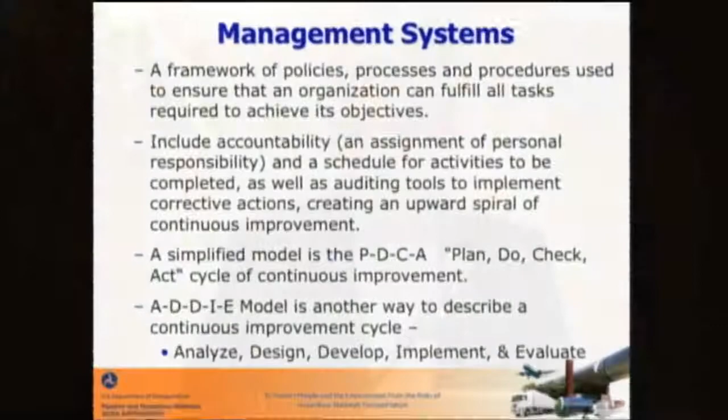That's what PHMSA sought to do with risk management programs since very early. In fact, we started with the risk management demonstration project and the systems integrity project, and then in the 2000s we implemented the hazardous liquid and then the gas transmission integrity management rules. Recently, in 2010 and 11, we implemented the distribution IM program and some hazardous liquid gathering integrity management requirements also. So we've now got the whole cadre of integrity management programs up and running.

Now, we've continuously sought to evaluate our performance on these. PHMSA is a team-based organization, and our teams of inspectors are grouped together based on whether it's gas transmission IM or hazardous liquid IM, and we bring back all the lessons learned, typically on an annual basis or through quarterly calls, and bring that into a team to understand what we're seeing on the inspection front and what our concerns are.

You may see a lot of those reactions in the frequently asked questions on our website. So you can look at the ways we're trying to continuously adjust and communicate our expectations about the integrity management rule.

We also use the data, and we've seen a lot of data, and of course I've got some data in my presentation, and data can go any number of ways depending on what we're looking at. Certainly we utilize our incident and accident data as feedback, and also our enforcement history on what we're seeing from our enforcement.

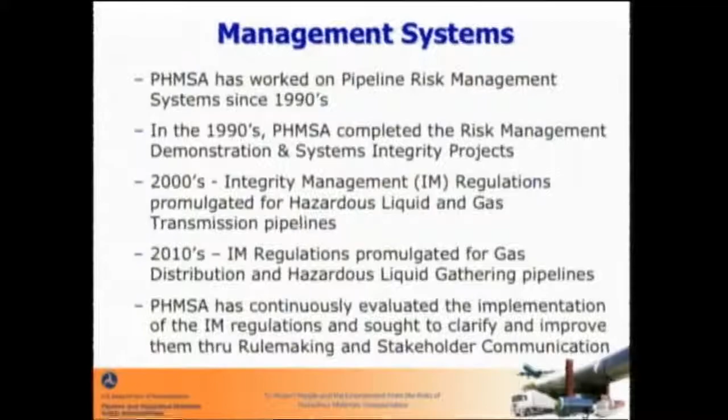On what we need to react to, whether that's communicating with stakeholders in public, or communicating with industry groups, like the subcommittees on integrity management within the hazardous liquid IM and gas transmission world, where we can discuss issues we're seeing crop up on a continual basis, to try to make sure course adjustments are being made on the industry level, and that they have awareness of issues we may have.

In the bigger sense, we then have to use the rulemaking process to affect that change in a documented manner. So in the late 2000s, we started implementing some of these inspection observations and other issues we were having, and we started writing on them, coming out in 2010 with the hazardous liquid advanced notice of proposed rulemaking, and in 2011 that same document for gas transmission.

Now, the other part that has come along with these are improvements, such as Ivan noted, that geospatial information systems, or GIS systems, where we can graphically layer data, layer information, as well as other data models and data acquisition tools.

There's been a lot of industry improvement that have allowed pipeline operators to be able to implement their work in a more technologically efficient manner. And so the integrity management rules need to be updated to reflect these technological developments, as well as to address the issues we've seen on inspections and enforcement and in accidents and incidents.

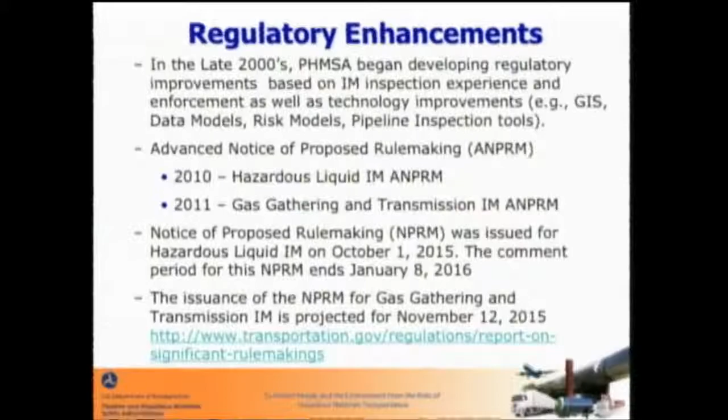Of course, that hasn't occurred yet, so it will be updated, but I left that in there since I sent Carl this a couple of weeks ago, as well as the fact that it's showing that it's imminently coming, and we are anticipating its publication soon and working diligently to make that happen.

Now, a lot of management systems show the DuPont-Bradley curve. This curve is also in the safety management systems recommended practice by API 1173, and it'll show on the y-axis incident rates or risk, and on the x-axis, time or implementation. The intent is that as we work through and continuously improve, we move from a reactive, high-risk environment where we have implemented behaviors and processes and procedures that have continued to improve, making us more proactive on addressing risk, and therefore we have a much lower risk incident rate.

You can see up top it talks about some of these behavioral modifications, where we're talking about achieving compliance to a minimum prescribed set of safety standards, such as what we have in Part 192 for gas and 195 for liquid, and moving towards a proactive safety culture where we're choosing to do the right thing beyond just mere compliance. That's what a lot of the management systems and team-based structures seek to do.

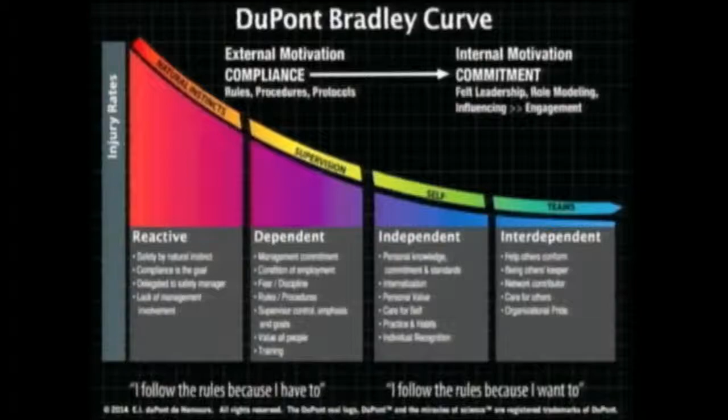Of course, as we get out far to the right, we're working in teams where data is not siloed within certain parts of the organization, but moved horizontally across organizations and whatnot.

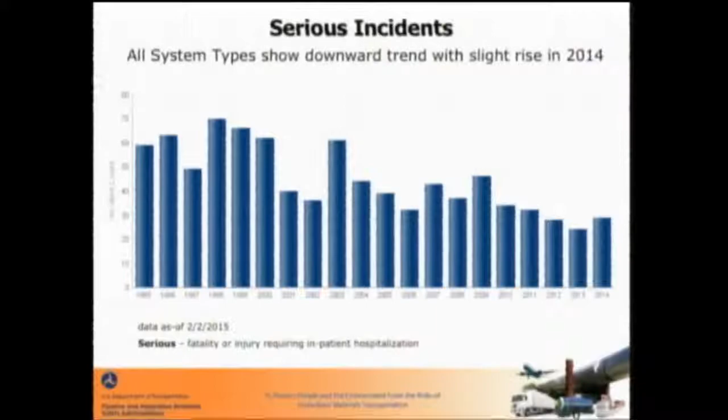Now, of course, I promised I'd have some data slides, which we've all seen. Here we see improvements when we look at serious incidents, but our significant incident rate is flat.

As has been discussed, it's always important to describe data in a number of ways. Is this data per mile? Because in the last 10 years, we've seen 70,000 miles of new transmission and 200,000 miles of new distribution put in the ground. Some has been abandoned or retired, but that's a lot of new construction, a lot of new mileage coming in. So when you're looking at things, you always need to account for the rate, or somehow normalize that per mile.

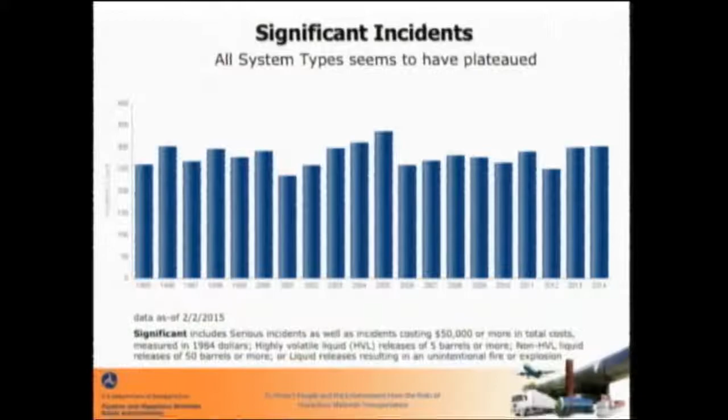You also need to look at, when looking at hazardous liquid, the facilities. Is that a right-of-way spill where it's out there with the public, or a facility spill contained on the property? Similarly with gas, it is not as extreme in terms of facility versus right-of-way. But there's a lot of ways to look at information, and I think some of the other ways you can look at cause data - these are all ways that we look at it.

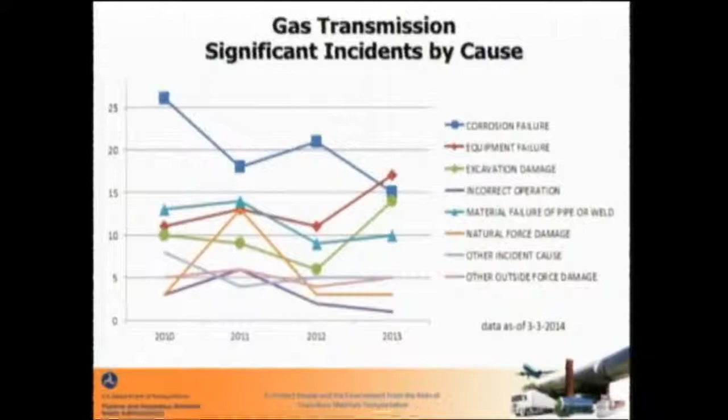I think the discussion that came up earlier about trying to make it such that an individual could evaluate information through the tool to see what they wanted to see - I think that would be a very nice thing, and hopefully we can get there someday.

Of course, we want more. We realize there are more, and that's why we started taking actions. To produce an advance notice of proposed rulemaking, you have to start writing it a couple of years beforehand. So in the 2007 to 2009 timeframe, following the implementation of hazardous liquid and gas transmission rules, we started identifying these issues and developing our advance notice for change. So we have been active in seeking to make improvements and continue getting these trends down.

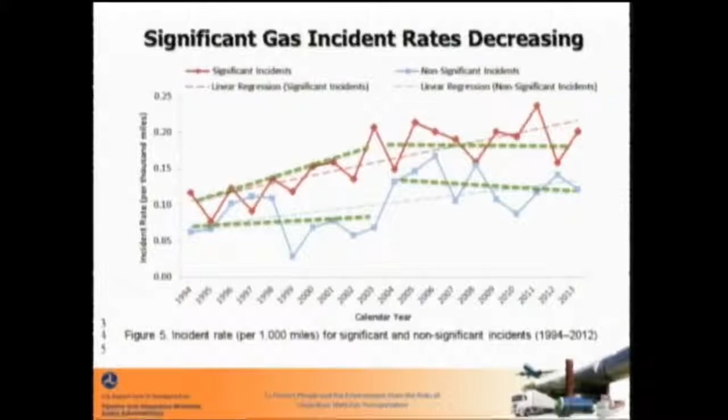Along with those actions that I just discussed, we also have some tasks pulled out of them that are external, such as the valve installation and minimum rupture detection standards. That was a study required by the last law from Congress, and it's put out on its own.

We've transmitted safety advisory bulletins on program evaluations and the use of meaningful metrics, further expounding upon our expectations of operators of what they need to be doing within the currently approved regulations.

The integrity verification process is one about verifying that the pipe in the ground is what it is with adequate records and testing. That was just announced within the hazardous liquid rule. It's not in the hazardous liquid IM rule - it's going to be external, but I think the natural gas transmission IM rule will have that IVP process in it, hopefully.

We've also gone through - there's a public meeting, I think, that started yesterday on the NPMS data gathering enhancements that are for the data. This is a lot of the things that Ivan was talking about, where we got excess flow valves on in gas distribution systems on residences other than single-family dwellings and in small businesses.

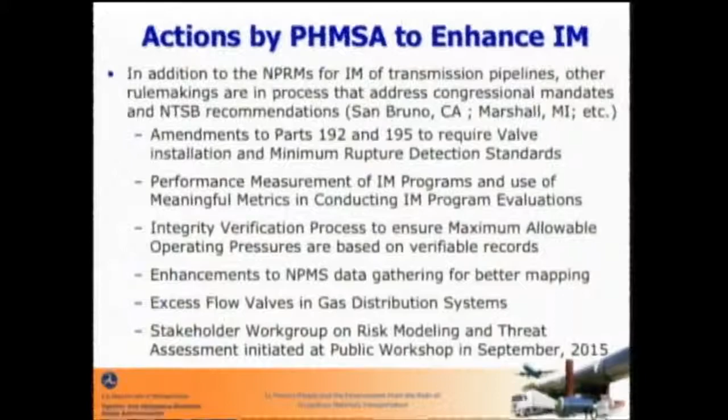I'd like to end with what was shown earlier by Jeff about the safety management systems public meeting we had, which is available on YouTube. You can see a day and a half's worth of meeting in about 6 hours by skipping through the interim parts, and it is 4 to 6 hours incredibly well spent. I've watched a series of these and lived with management systems for quite a while, and they are effective in reducing risk and improving integrity, throughput, reliability, and other efficiency models that operators see for maintaining the profitability of their pipeline.

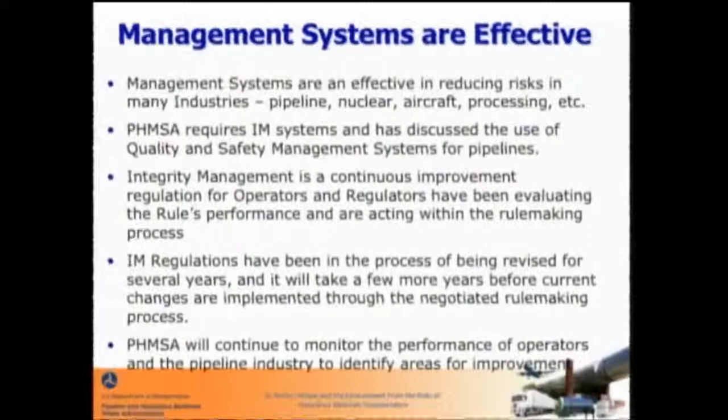Integrity management as a management system is a continuous improvement process, and we look to continuously improve the rule. We have certainly embraced the comments from Ivan and Nathan Doble in their work, and we were acting on several of them at the time. We have formed work groups and sought to act on all of the recommendations in rapid order.

Within the state program's recommendations, we've already taken action to modify our state programs, guidelines, and documents to include mentoring and on-the-job training for state inspectors, and improve the state-to-state OJT experiences they can have on operators they share across state borders, as well as participating in federal inspections. We've always participated with states on federal inspections when we had assets covered under an integrity management program during the same inspection, but we needed to formalize that and try to move towards invitational travel to support our state partners in the constrained resource environment they often find themselves in.

Within mapping and GIS, it's going to be difficult to mandate geospatial information systems, but the reality is most operators utilize it because it makes business sense. Using integrity management as a reason to get it into their operations has made their businesses more efficient and effective, even down to mid-size and smaller distribution operators, who have geospatial information systems, even though they may be cloud-based and less robust than larger operators. We've also moved on that mapping piece to go beyond the NTSB recommendations, including a wide breadth of required fields gathered from pipeline operators to improve the mapping program, which is open to the public in a public viewing forum, and we look for improvements there.

On high consequence areas and threat interactions and threat eliminations, we are looking for work groups to develop information that we can put into guidance and our inspection tools, both our inspector guidance and the inspection protocols or questions we use. The work group that is going to be formed for risk modeling in the coming weeks, with its first meeting to discuss that, is going to cover the threat interactions and the risk assessment piece extensively.

I think that's really where we are going to look for guidance, especially on threat elimination and threat interaction. Those are two difficult points during an inspection to determine when a threat is of a significant or insignificant percentage in the operator's operating environment that they can discount addressing, because you can't address every threat with every inspection method. But when does a threat rise to a point where I must address it, and what are some criteria, because that value is going to move? When does an unknown become so significant that I can no longer assume I'm not going to address that unknown material?

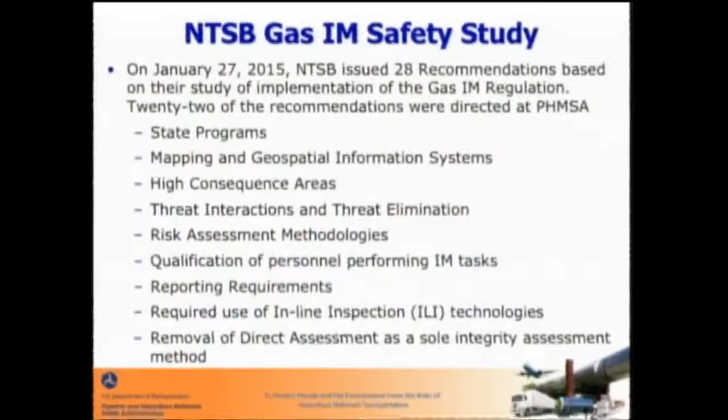The required use of inline inspections on all pipelines is something we are looking at through the notice of proposed rulemakings, through looking at ECDA and whether it is a viable sole assessment method, and things like that. I think we'll have more information on that as we go through the month or two. So thank you again for all your participation in pipeline safety—we all make a difference.